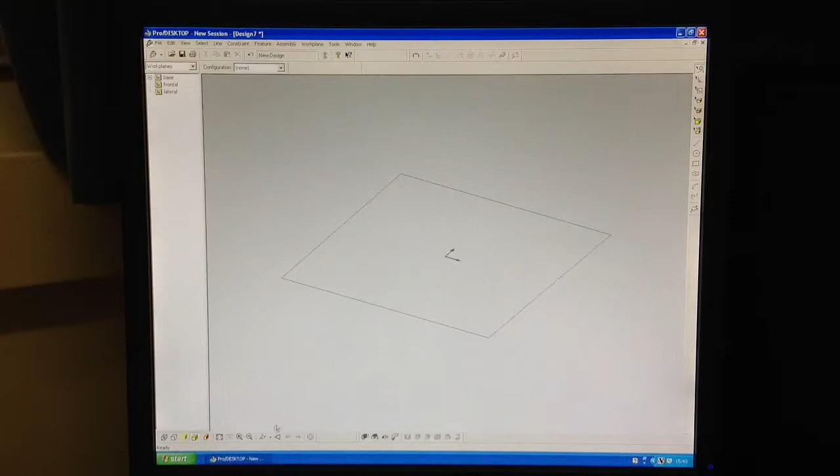I'm going to view onto work plane and draw a very simple shape, a rectangle, which I'm going to make 100 by 50 millimeters.

The Extrude tool is down here, and we'll talk about project next time. It looks very similar, but it's on the left hand side, and you get a dialog box that shows you a whole variety of different aspects that you can change.

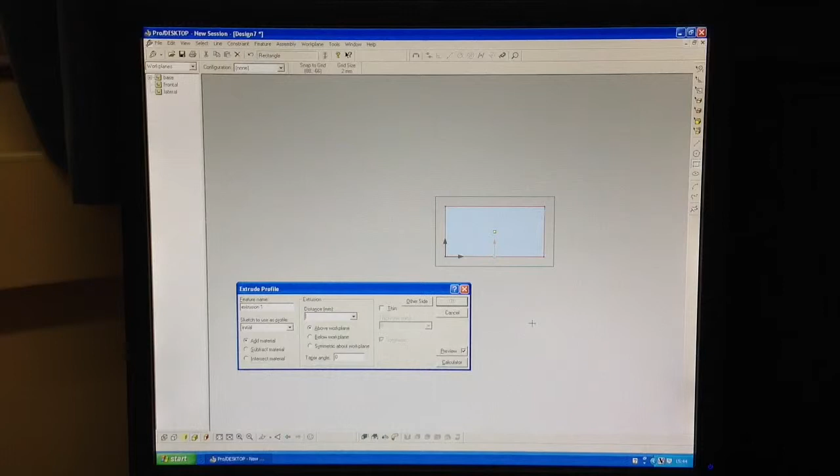Now I'm going to rotate by using the scroll button in the middle of my mouse. By pressing that down and moving the mouse around, you can see how I've got that at a slightly different view. Now if I type in a distance here for the extrusion of 50 millimeters, you can see a preview of what's going to happen.

Now I want to change that to 60 instead. It updates. Now I could also put a taper angle on, and I can even add a thickness.

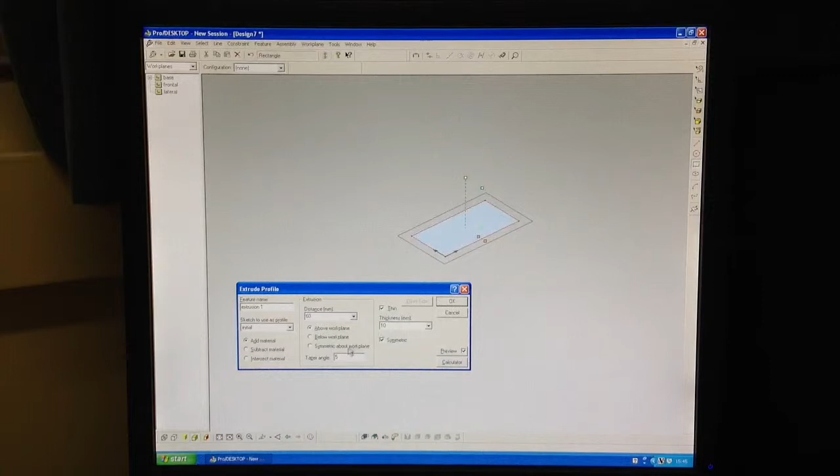Now this is struggling to put a thickness and a taper angle on at the same time, so let's get rid of the taper angle and you can see how that works.

Now you can see these small buttons here. I can use these to change a whole variety of different things. So for example, this one allows me to make it thicker and thinner, and this one allows me to put it up and down rather than typing in the dimensions as I did before.

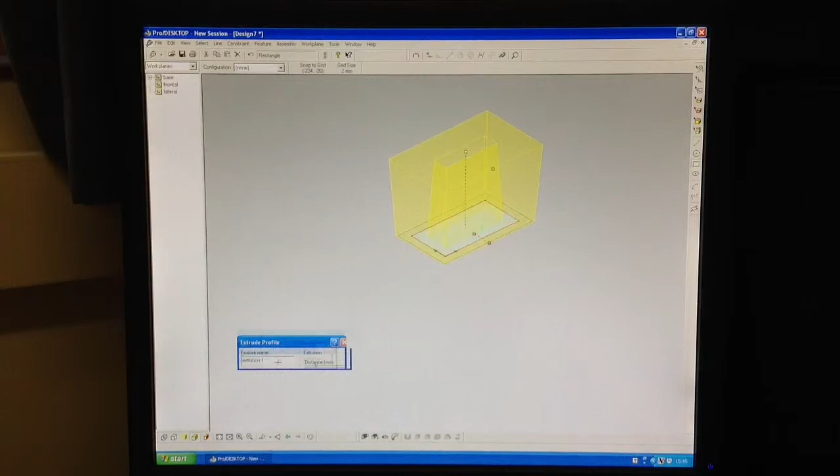This one here will change the taper angle. You don't have to type in here. Quite an effective shape that, I like that. We'll press OK. So that's a simple extrusion.

Very often you want to do an extrusion that isn't from one of the work planes - here's the work planes that you can see normally. So I'm going to show you very briefly in the next minute or so how to produce a new work plane and a new extrusion with a new sketch onto a different face.

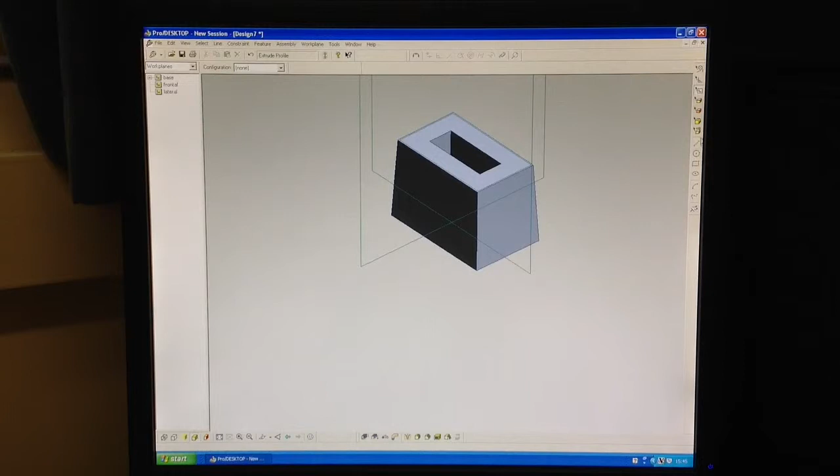This tool, fifth one down on the right, is the Select Faces tool, and I'm going to select this face. Notice if I try to hit the center here, it doesn't quite work.

I need to move towards the edge of the face. You can see how it highlights and then selects like so. I'm just auto scaling there to make it more easily for you to see.

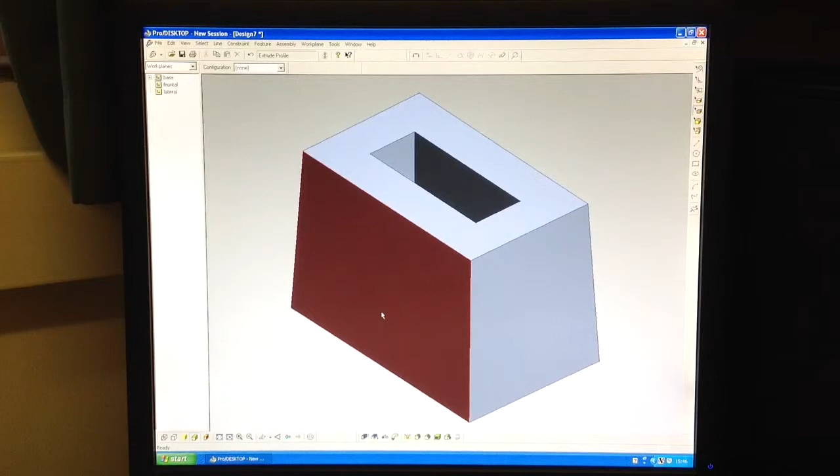The easiest way that I found to add a new sketch onto that face is this drop down menu here called Work Plane. It allows me to put a new sketch onto it, and it will automatically create a work plane on the face that I've chosen. It's called Sketch 1, we'll stick with that.

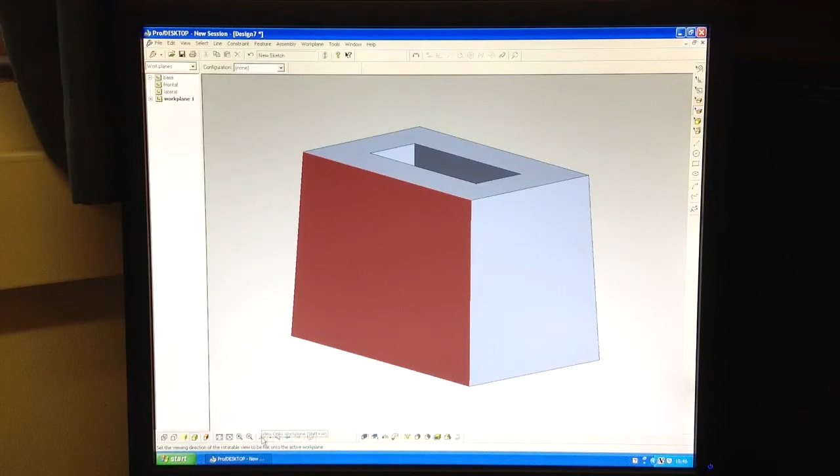It's now ready, or expecting me to draw on here some sort of shape. I'm going to view onto work plane. I'm going to draw quite a large circle. You can see what that is.

And I'm now going to extrude again. Do you know what? I'm going to show you how to use profile as well. I'm going to use the project profile. It's very similar to extrude. It does almost exactly the same thing.

You can add and subtract material above or below the work plane, but this time I'm going to subtract material below the work plane. So notice how that arrow moves backwards and forwards. But I'm not going to go through the whole part.

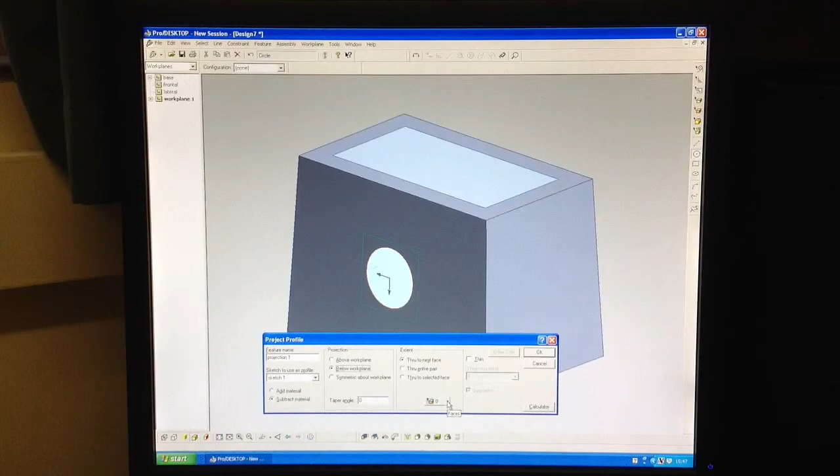I'm just going to go through to the next face, which will be this inside face of this bizarre shape here. I could even select which face I wanted to. And you can see how it basically took that shape out.

So there you go. Extrude and project profile in one demonstration. Have a play.